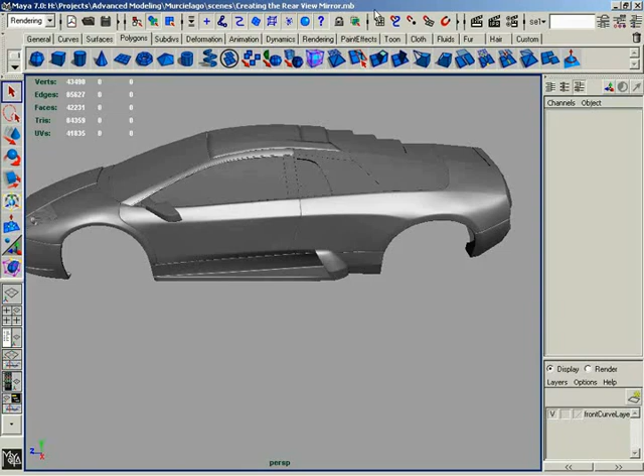Alright, let's continue finalizing the various panels of our car. I'd like to take a second and focus on the roof.

Now, my viewport's slowing down just a little bit. Not too much, but enough for me to notice while I'm spinning around here. So let me simplify some of these verts. That's a little bit better.

Now, up here on the roof, we have a lot of cleanup to do, because this looked pretty good for a preview. But we need to get rid of some of these normal issues here across the top, and you can see we have some tweaking to do. There's some lumpiness and bumpiness that needs to be cleaned up.

So for starters, we're going to get rid of that creasing for the time being, just because a bevel is going to serve us better, very much like many of the other panels we've been using here.

So let's shift right mouse and grab the poly crease tool, hold down the Shift key and click on each and every one of the creased areas. Now, you've got to make sure that your poly crease tool is set to extend to selected components in order to get all these. Then middle mouse click and drag to the left to get rid of all of that creasing.

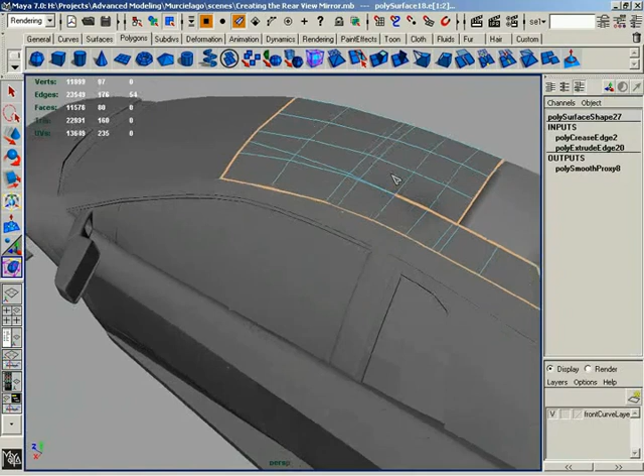Switch to your high res just to confirm. And before we even go about the process of beveling these out, let's take a moment and tweak out some of the areas of our roof, because we can already see some problems. We have a crease running in this direction, and we have a crease running in this direction. Both of these need to be smoothed out before we go too much further.

So I'm going to get my Move tool, and we'll grab vertices and just start spreading these out. Now notice for now I'm curve snapping. Later on, as I start looking at indentions and things like that, we'll start tweaking out. For now, just keep it simple.

Now we have several vertices here along the edge, so make sure you go into wireframe view and get all of these at once. So that should help that crease, and it does.

For now, we have another crease though, because of this little crease that appears here. These edges are a little bit too close together and could probably use some tweaking in their own right. Now, we know just from working with it, we don't necessarily need to have all of this topology perfectly lined up with each other. So let's go ahead and start spreading some of these out.

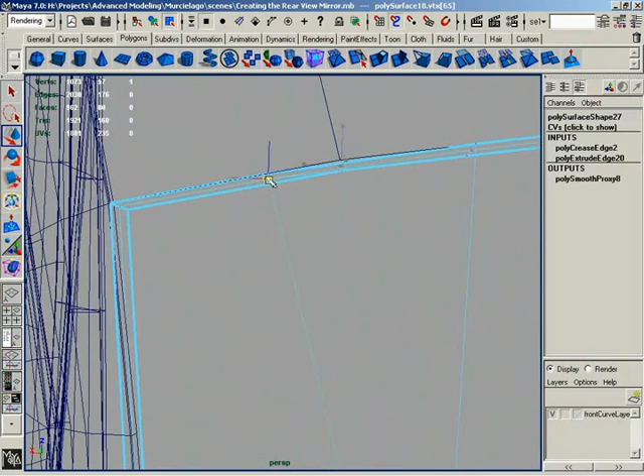Just curve snap these over, and we'll pull this over, like so. And you'll probably get away with pulling that inwards just a little bit. And in wireframe, it looks a lot better.

Let's go to smooth shading. And yeah, a few tweaks maybe aside, that looks a lot better than it did just a few minutes ago.

Now, we need to go ahead and put in those bevels so that we get that nice creasing all the way around our shape so it's not over smoothed. So let's shift right mouse - actually, we can probably get Y, so hit the Y key and get those creases again. And hold down shift, make sure you grab all of those creases, shift right mouse again, and choose bevel edge.

And your bevel is going to be small because of some of the selections you've made, which is fine. We can definitely deal with a small bevel in this case, and if we need to enlarge it, we can do that manually.

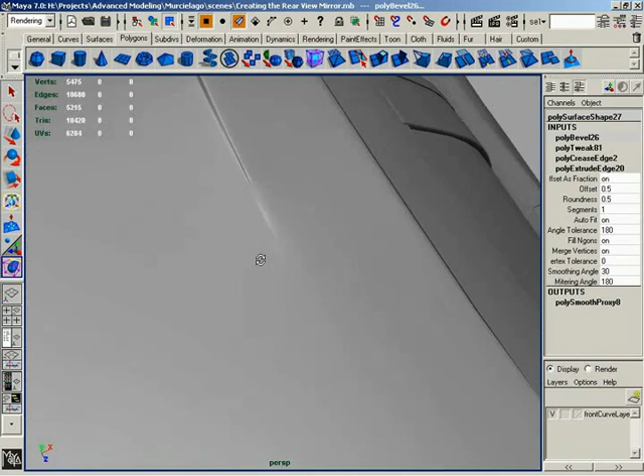Okay, for starters, though, if we switch over to our smooth, you'll probably notice some kind of odd pinching taking place up here where this crease takes place. Now, from certain distances, this may not look too bad, but we can smooth this out.

If we come in and grab our - well, let's go to object mode and then shift right mouse and get the split polygon tool. We'll split this straight across like so, that becomes a quad.

And then you can actually, if you switch over, you'll still notice a little bit of creasing. You can smooth that out if you take these vertices here at the tip, where it's going to be kind of like the bevel wraps around in a little U, and just curve snap these outward, which will stretch out the U-turn area, and that really softens that up.

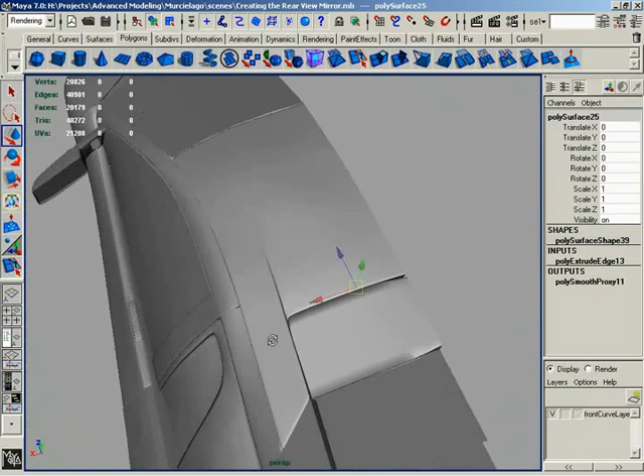I'm thinking that we could probably use a little bit more rounding down this area, because it looks just a little bit too flat.

So what I'm going to do, at least for the time being, is undo to get rid of that bevel, because I don't want to work with so many extra vertices right now. I'll just back up a few times till we're no longer beveled. That'll work.

Let's go to Object Mode, and I'll get the Split Edge Ring Tool. Yeah, that worked out really well. Saved us a little bit of time.

You'll notice that your shape changes just a little bit, and probably looks even more flat than it did a minute ago.

The cool thing is, though, that now we can come in here and grab vertices and add just a little bit of rounding to really help clean up this shape. Now let's take all of these vertices and straighten those out, like so.

Now let's go back to shaded view. What I'll do for now is just gently eyeball these, pulling them up a little bit, sighting down the car.

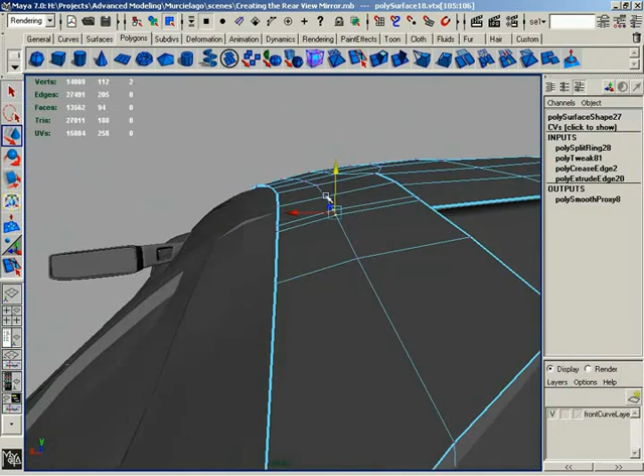I need to come back and separate these vertices here in just a bit. Just kind of make a mental note of that.

Alright. It's subtle, but it should really help things out later on. That still looks pretty smooth right there.

Okay, so let's put that bevel back in. We'll go back down and grab our Poly Crease tool, hold down Shift, and get all of these edges.

Now, I did notice a second ago, there are probably some edges here we don't necessarily need to bevel, such as we don't need that edge or that edge. We probably will need that edge.

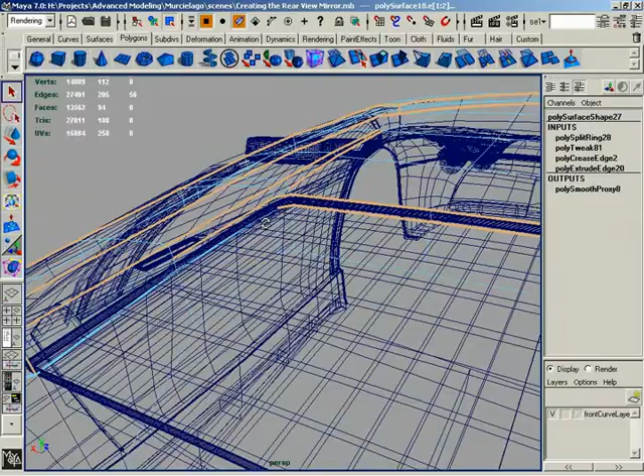So let's take just a moment and customize this a little bit. We don't really need that edge, but we probably could use that one. I'll keep an eye on that — I may need to come back and adjust it later. We don't need these lower edges.

Don't need that edge either. We don't really need to select down there; it won't really do us any good anyway. These you can deselect if you want, but they're borders, so they're not going to bevel in the first place, so I wouldn't worry about them.

So now let's try beveling this, and switch over to smooth. Things actually look really clean right in there, so that's good.

Let's take just a second and put back that little split that we added over here just a moment ago.

Grab vertices and spread this down the tracks a little bit — that cleans that up very nicely. Overall, the roof is looking a lot better than it did a little while ago anyway.

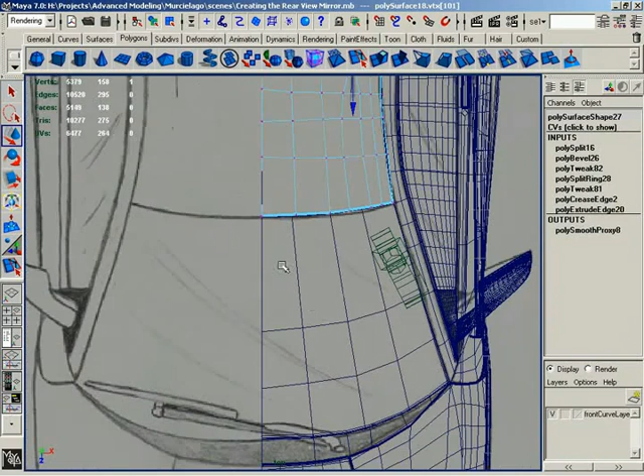Let's come over here to a top view to kind of cross-reference things. Not looking too bad. We'll probably need to come up here and close in some gaps.

Now, just as a bit of a side track, it would probably be a good idea if we took just a minute and smoothed out the windshield. You can decide on your own whether or not to do this — you may not need to.

In fact, I may not need to. I should probably kind of investigate the matter.

The trick is this: depending on the amount of detail you have, you may have a little bit more or less detail than I have on my windshield.

If you think there's a chance the audience will be able to notice the nickeling, or the actual individual polygon faces all the way around the top of the windshield, you might want to consider smoothing it.

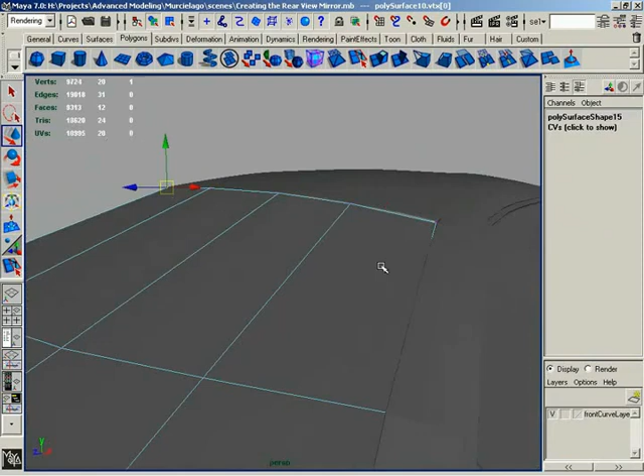In my case, I'm not entirely convinced just yet that they'll be able to notice that, so I don't think I'm going to worry about it.

If I decide to smooth it later on, like after I mirror the whole car over, and I think to myself that it's got to be smooth or it's just not going to look right, then I'll worry about it then. So we'll leave the windshield just the way it is, but keep in mind that may be a concern depending on how you've created your model.

Now, because the door and the roof are now smooth, it's a good idea for us to take just a moment and make sure the door and the roof line up accordingly down this seam. We already noticed a little bit of a problem up here, some minor separation.

Now, because we have an extra edge here, we don't really need to do that little crease technique to pull our corner in. Our corner looks pretty good, actually.

But we do need to make a few adjustments. So grab all of the vertices at the corner — we can pull these in a bit.

Be sure to check your relative elevations. You'll notice that in this case the roof is popped up over the door, so we need to pull that down and put a little more separation in there. This will just be a work in progress.

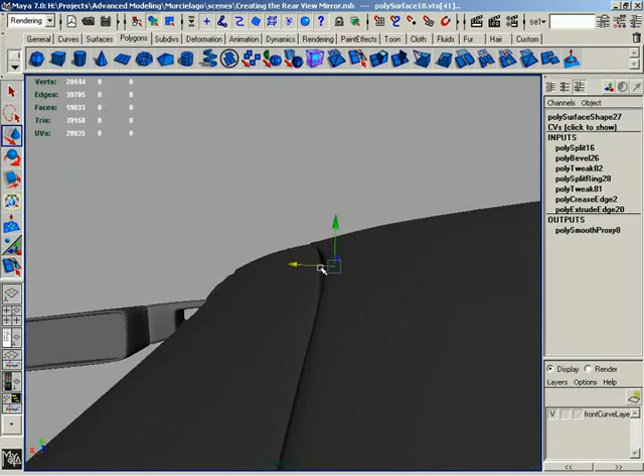Work in progress. Just walk down the side of your car and clean up the seam in between the two.

Now, if you should notice an area where you need a little more detail, it's possible, hard to say really, let me back out. Nah, I think I'm okay.

You might end up with an area like right here. It might help to have an extra edge. Don't be afraid to put one in if you think you need one, like if the smooth is just straightening out too much and starting to pass through the door. Let me put one in just as an example.

Just come in here and grab the split edge ring tool, pop in a new edge, and when you have it selected, you can add your little bit of rounding just by popping that up a little bit. Now you've got some vertices over here that you can work with.

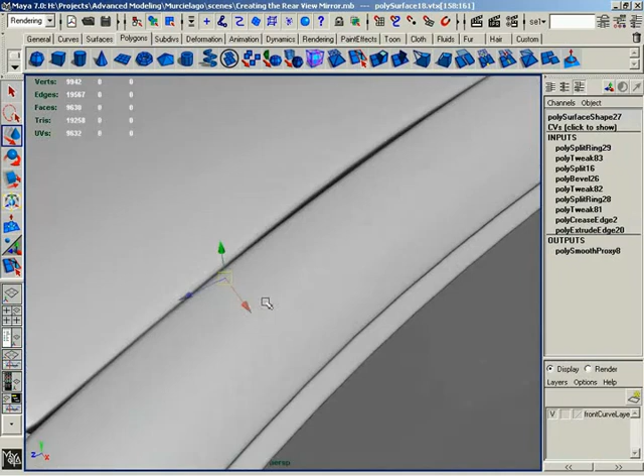So now we can adjust that, make sure that gap is butted up nicely. We can adjust relative elevations, and now move to the next section.

So it's all about if your mesh seems to be straightening up a little bit too much, you can clean that up a bit.

And pull this out, clean up that little gap. I'm just hitting those arrow keys. You can probably hear it coming over the speakers.

Right. Whoops, went the wrong way.

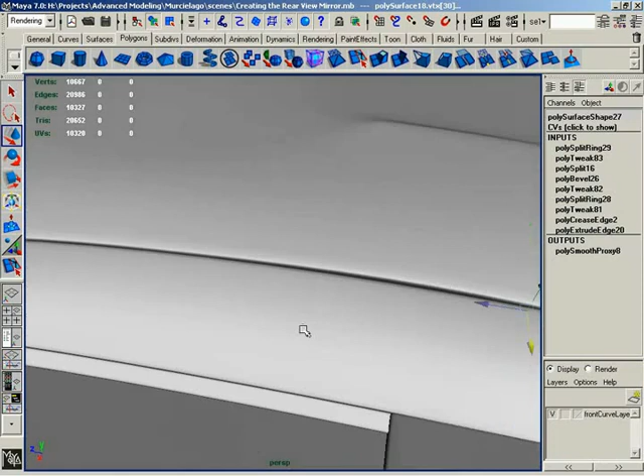Now, I'm not going to worry about cleaning up the gap in between these two pieces right now. This piece is yet to be finalized, so I'll come back to that a little bit later.

Over here, probably going to be a good time to maybe do a few tweaks. Looks like we may have some very slight denting right here. It's a little hard to say, really, so hard to say that I don't think I'll stress about it too much.

Maybe this piece could come up. This is where you can just kind of kick back and be a little nitpicky.

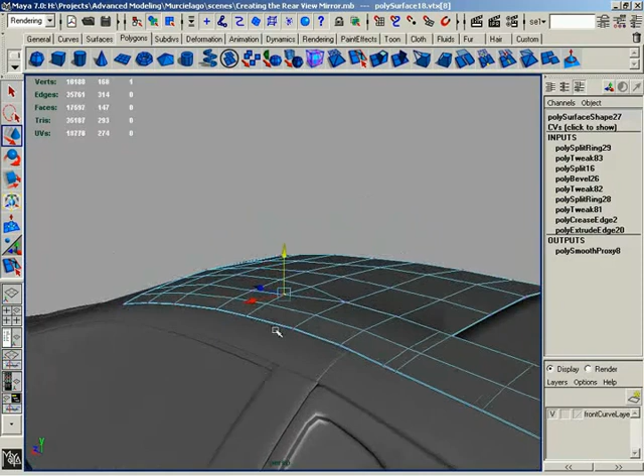Looks like could bring this up. Yeah, it looks a lot better. Skip that one, maybe tug this one up.

You'll start to notice patterns that you can follow real easily once you get to a certain point.

Is it just me, or is that whole area kind of dipping in? It really looks like it is.

If you want, and I don't recommend you do this and leave it, but what you can do is go ahead and mirror this polygon just as a test. So if you shift right mouse, you can go down to mirror polygon, negative X, select your poly mirror and set your merge threshold down to something very small.

Now in this case, you'll notice that we didn't have all of our vertices lined up, so we need to undo that. Let's click on the x-axis, and we'll grid snap holding the X key and just middle mouse gesture, and that should clean everybody up.

Now let's do that again. So, right mouse, mirror polygon, negative X, boom. Take that poly mirror node, set its threshold down to something very small.

And this will help you see things like dents. You can see now I've got a little bit of a dent here in the middle, it's a little more obvious. So if you're having a hard time making those out, just remember that you can do this.

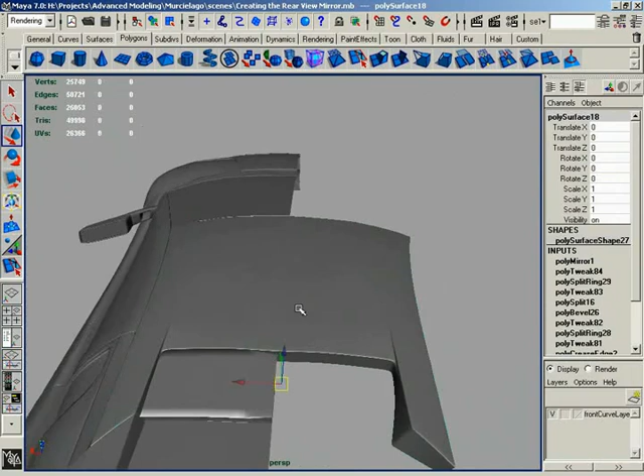So I'll undo. I kind of saw them there to begin with, but I wanted to give you guys a way in case you have a problem making them out for any reason whatsoever.

Now one of the ways to fix this is to take each of the vertices at the central axis, and you can snap them in Y to their next door neighbor. So point snap, make sure you didn't click on somebody you weren't supposed to, and then make sure they're just pulled up a little bit.

Because you don't mind a little bit of upward doming, it's just when you dent in you start to have problems. So you can test all of them that way, or like in my case, I know that that's dented in.

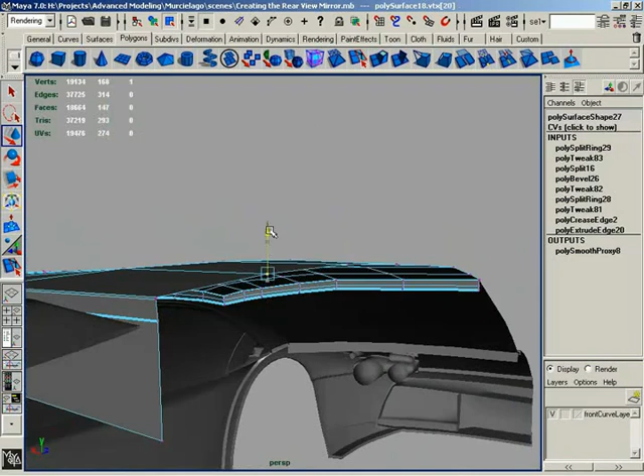So we'll just kind of pull these up a little bit. Also, if you don't want to stress about it too much right now, keep in mind that after you mirror, it's a good idea to go through a final tweak phase, or right before you mirror, actually both—do once before and after. So we'll probably have some last-minute tweaks right before we mirror things over. Once mirrored, we'll grab all the central pieces that have been mirrored themselves—things like the roof, the hood, the front bumper, anything where two pieces have been duplicated and merged together to form one single new piece. We'll take some time and look at those to make sure any tweaks that need to be made are made.

Alright, so let's go back to object mode, take a look at our high res. Things are looking sharp all in through here. A little bit falling off as we come back in this general direction, but that's okay, because we need to finalize this piece and then we'll start matching all of that up. So, one thing at a time, they say.

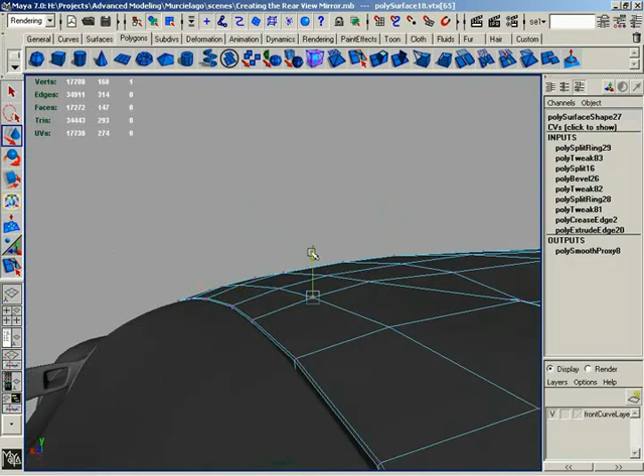Now, I could be nuts, but I think I'm noticing some denting in this area here, probably due to these vertices. It's going to be a little tricky to see—a lot of these you'll only notice at a certain distance. Like if I back out to here, it becomes a little more obvious. Maybe earlier when I was pulling out these rounding verts, I got a little carried away on a couple of them, which could cause that. Actually, that one little bit I just did helped out quite a lot.

Now, I'm thinking that the next dent is taking place right in here. I'll gently pull these up just a little bit. That looks a lot cleaner from back here.

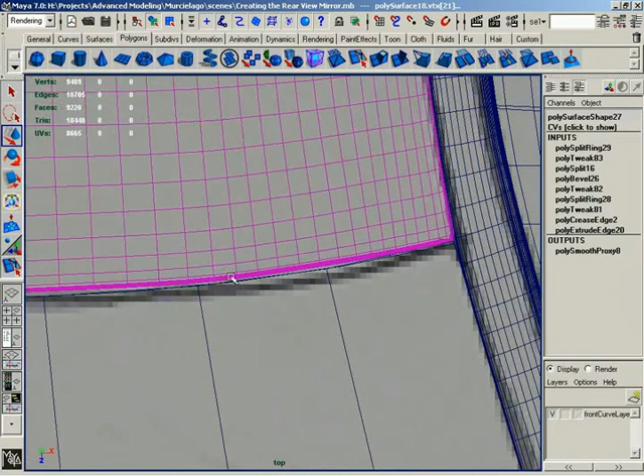Okay, let's pay attention to what's going on up here across the front of the car—or across the front of the hood, the roof anyways. Alright, one row of vertices at a time here. Double check in the top view. It looks like the roof actually needs to be pulled forward to meet the existing windshield geometry. So that's the way we'll handle this—we'll pull forward in X, like so.

It looks like as far as relative elevations are concerned, I'd probably get away with pulling this up. It's really more or less just to catch a highlight across this panel, not really for any other reason, because I imagine that on the real automobile, these pieces are going to fit together really, really well. I mean, come on, it's a Lamborghini.

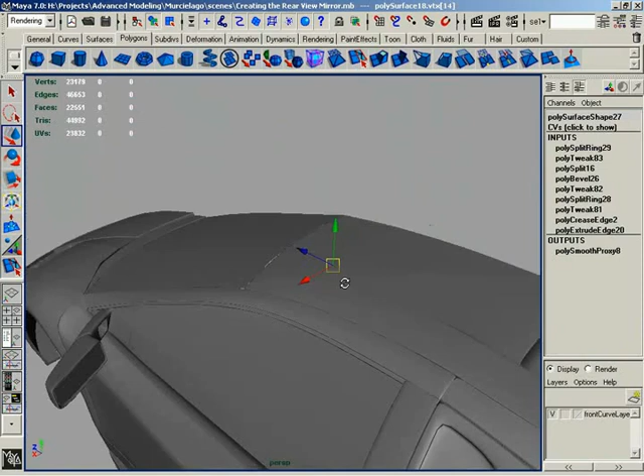Alright, and yeah, let's pull these guys down just a little bit. Now make sure that didn't put any nasty dents in what you've been working on so far. Seeing just a little bit of a dent in through here, maybe something very small, probably virtually imperceptible, but alright, now let's double check with the top view.

Yeah, we'll bring these vertices on the roof forward as opposed to bringing the windshield back. Okay. Excuse me there. And let's see, looking good up through here.

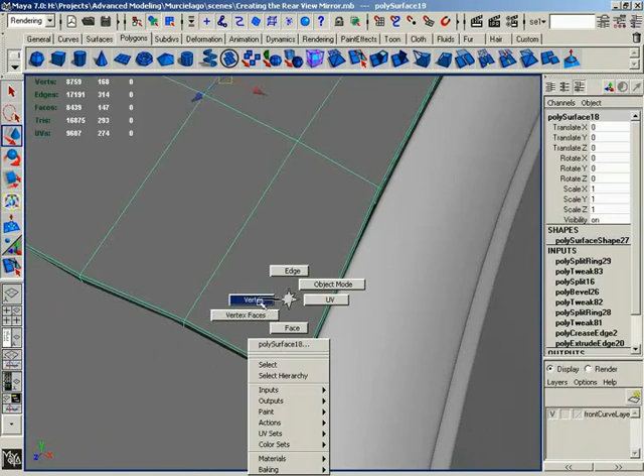We could probably take the corner of the windshield, though, and pull it down a little bit, because it is sticking up beyond the door. That's a minor problem. We still have this corner, which is separating a little bit, and we can pull it over a little, and that will help things out. Also, it's going to be a good idea to grab the windshield and actually tuck it in just a little, just to help things out.

Now, again, we're starting to see some separation in what the windshield is doing, so it may be a good idea—I know I talked about it earlier and had at that time decided not to—it may be a good idea to go ahead and smooth out the windshield. Now, we know from past experience when we smooth out the window that this will cause the corners to be rounded out. So what we're going to do real quick, the same thing we did before, is grab our split edge ring tool, and we'll put extra edges at the far ends of the geometry.

So, like so. And actually, we should probably set this over to relative. I believe it's a little closer to absolute. Let's go to object mode. Yeah, we'll set it over to relative.

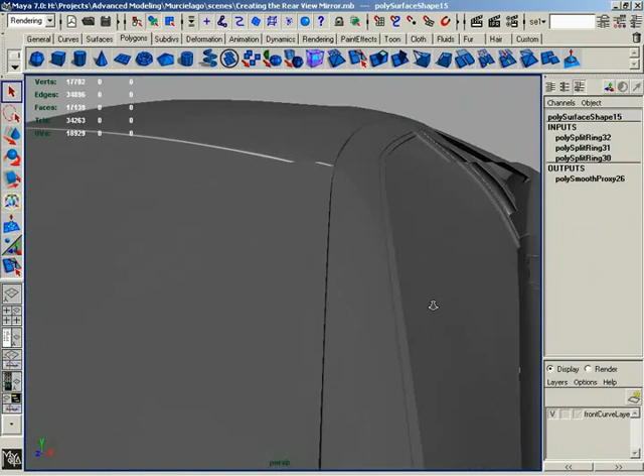And there we go. So with that, if we select the object, hit Control tilde, we get a nice smooth version of it, which we can now test out and see how that lines up. Much more smoothly all the way across. Can probably grab this vertex and tug it up just a little bit. Ooh.

It's interesting. Now let's see here, if I grab this vertex, I'm running a quick test. It looks like I might have... no, okay, I thought the connection between my smooth and my low res was destroyed there for a minute. Just making sure I haven't completely lost my mind. There we go. Don't know what was happening there, but as long as it's not doing it now, that's fine with me.

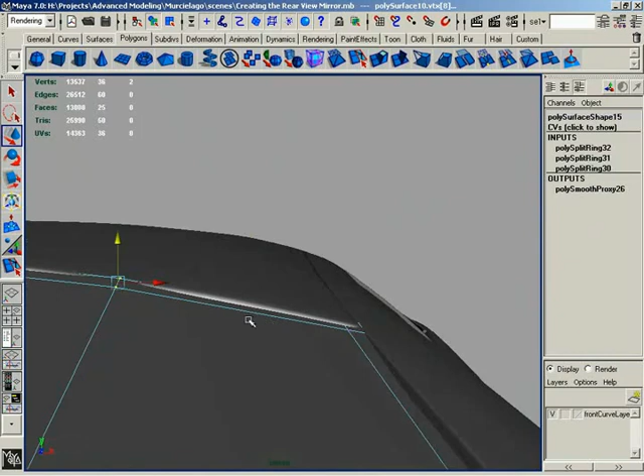So we'll pull that over. Probably tug that up just a little bit. Might be a good idea to have another edge of detail over here, because the windshield stays pretty flat most of the way across, but then gets a little more rounded here toward the edges. So it would make sense if we wanted to add some more detail here toward the end of the windshield.

So we'll just use the split edge ring tool, split down the middle, grab this new edge and tug it up just a little bit. Actually, won't even do that because I don't want to move some of the verts down there at the bottom. Okay.

Actually, maybe pulling these forward in Z might be a little more of a subtle way to create that rounding we're looking for.

Alright, so it's looking sharp. We could also, just for sake of argument and cleanliness, go ahead and add blinn1 to our windshield temporarily. That way we can see a reflection. Or if you want to get fancy, you can assign, was it phong1? Is that the one that was transparent? Yeah, so have a little bit of transparency there.

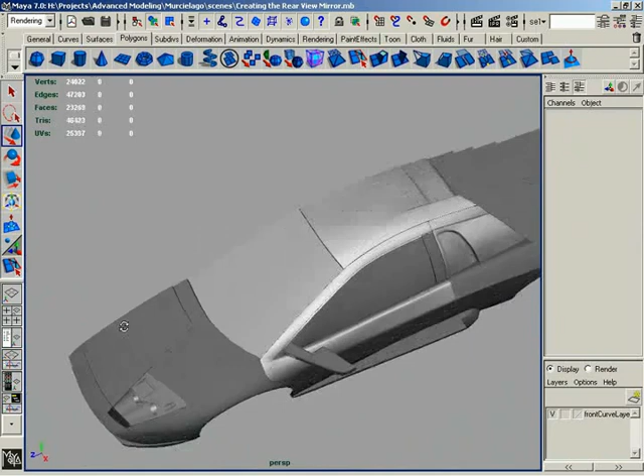I'm going to take just a second, though. That's just a little too transparent. I need to remember that the thing is there, so we'll bleed back a little bit on that transparency, just for the time being. So there's a window for you, and we can do the same thing over here.

So now your windows are starting to look and behave like windows. How cool that must be. And I think that moves us over here to this next piece of the roof. Yeah, I can't think of anything else we really need to do up there for now.

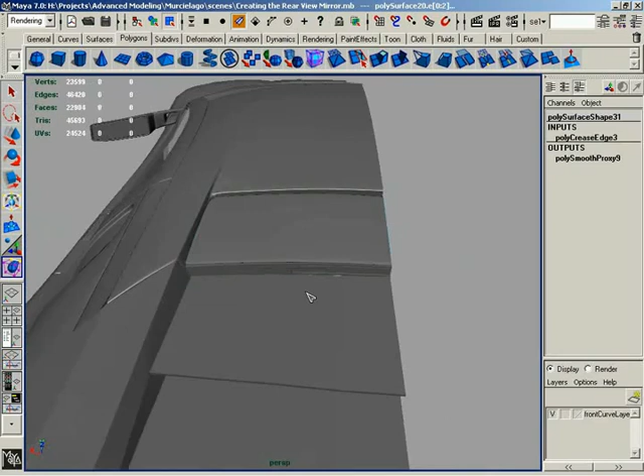So let's grab this piece, and again, the creasing at the corners is just a little too dramatic for us in this case. So we'll grab the poly crease tool, grab all of these, middle mouse, drag to the left to cancel out that creasing. So there's a confirmation that all of that has gone away.

And with those edges selected, we'll just bevel and give a quick test. And really, things almost immediately look just right. A few tweaks aside, it looks pretty good.

So let's start grabbing some vertices. It looks like we've got some relative elevations we need to clean up a little bit. A little bit of creasing that we could adjust here and there. So we'll pull this up, make sure these are at very close to the same elevation.

And grab the next row of vertices. Same thing, pull back a little bit so they're not completely running through one another. And over here, continue. Got a little bit of a gap in there. Maybe I should go ahead and close that in. It's a lot better.

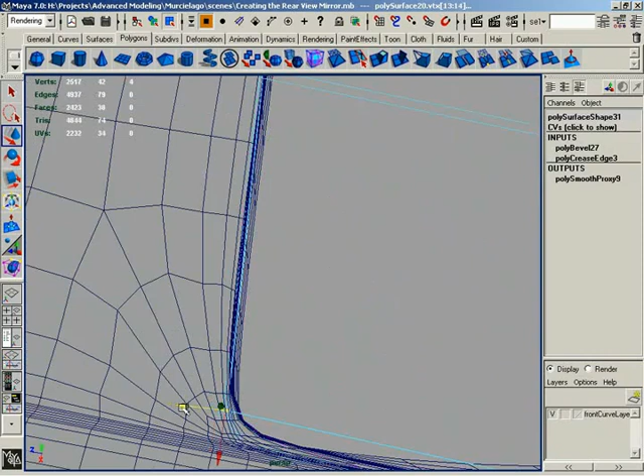And can't even see that one, so we'll pull this out. In fact, let's pull it out until we see a gap, just so we know what we have to work with here. And we'll pull this up. Seems to help out a lot.

Let's grab all of these vertices, and we can pull these up. Now notice in the proxy mesh they are kind of running through one another. That's very common, don't let that get to you too badly.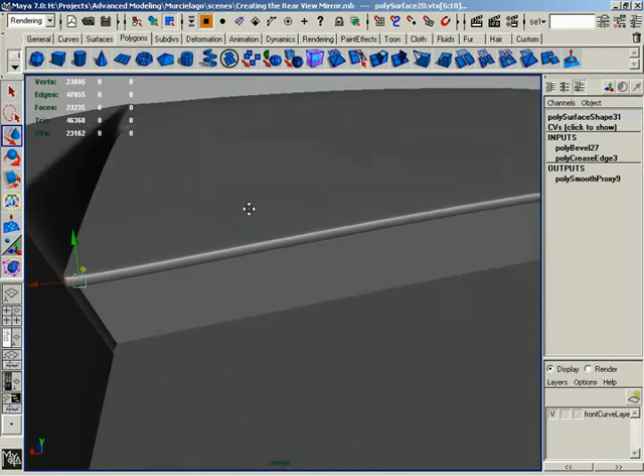And then over here, we'll just pull these out until we can kind of see the joint. Actually, let's pull that back a little bit, something kind of like so. Nice and rounded all the way around. Okay, so I think that's going to work for that piece.

A little bit of a downward slant, which actually I don't really have a problem with. I imagine that's pretty close to the way it is on the actual car. So I think that's going to just about do it for the hood, the roof.

Thought I noticed a couple of dents here. I know, I'm like Moby Dick when it comes to the dents. I think I see them and I just go crazy, Captain Ahab kind of thing.

Okay, so I think that's going to wrap it up for the roof. I can't think of anything else to add. Now, while we're back here, we could clean up this panel, which should be pretty quick. In wireframe view it's already looking good, but there's a few things we need that aren't in place. We need some thickness edges to help keep contiguous rounding at the corners. Let's start by creating those.

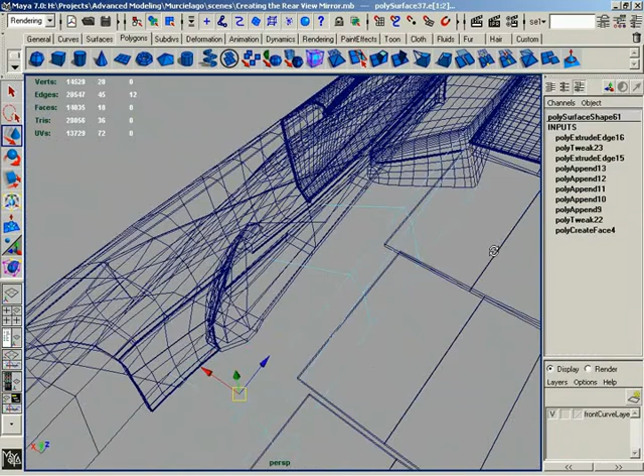Let's grab all of these edges wherever two panels are going to be meeting, and we'll simply extrude these, pushing them in Z local. There you go. Now I don't even know if this thing has been smoothed—I don't believe it has, so let's take care of that. Hit Control tilde and shift over to your smooth.

Go ahead and right mouse, materials, and drop that blinn1 on it.

In fact, I know I've been so disorganized here lately, so you guys should all—everybody on the other end of the machine—boo me real quick for being sloppy. Come on, I want to hear it. Boo! Alright, I'm going to go ahead and name my materials just real quick.

So we'll call this car paint. I heard one of you not booing. Glass. And we'll call this—not block, but black plastic. So there you go.

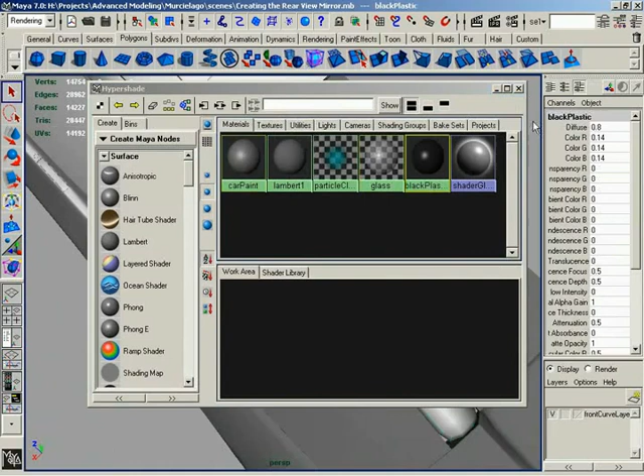So here's our little piece, looking pretty good. We, of course, need to do that bevel trick, so let's make sure we bevel this piece because it looks like it needs a nice solid crease all the way down. Let's go into wireframe view so it's easier to see what's going on. We can grab that and bevel this corner that comes in just for good measure. We probably won't need to, but it'll keep things looking nice and neat where these edges meet. We might need to clean some of these up down here, but we'll get to that.

Now let's see—that corner and this leading corner all the way down. And grab that corner and that corner. I think that's everybody. Just to be safe, grab this corner and this corner. Could also put a bevel here, down through here just for good measure, because you can see the change in direction that takes place there. If you do that, run it all the way to the end of the surface, and grab the little indented edges as well. I think that's everybody we really need.

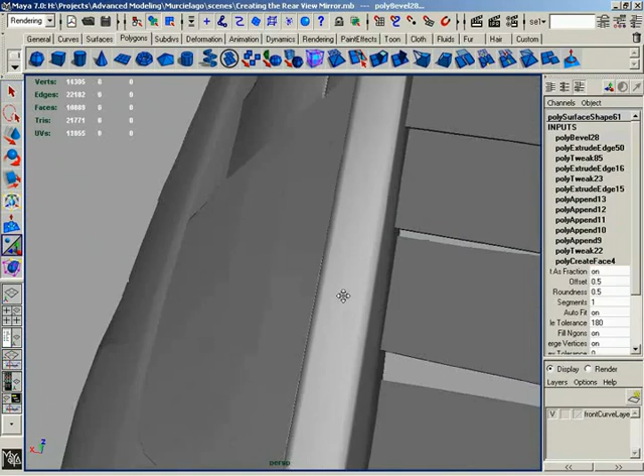So let's shift, right mouse, bevel edge, and have a look. Already that looks pretty sharp. Let's go ahead and push up to the second level of detail. And I am relatively pleased.

Now, we have a little bit of rounding on this surface here on the roof, and we have no rounding here. I don't have a problem with being nice and flat by the time we get back here, because I think that's more accurate to the car. But up here toward the top, we may want a little bit of rounding. So let's grab the split edge ring tool and drop an edge down through the middle of this, which will help flatten this out as we go down. Up at the very front, we can grab some vertices and subtly adjust, pulling that up so those kind of meet.

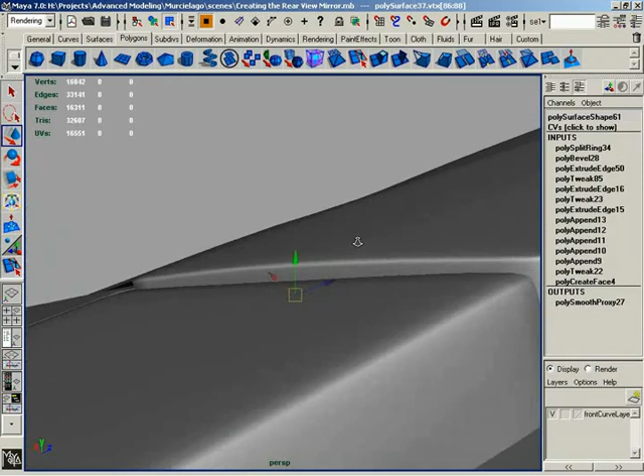We also need to make some adjustments here as well. Let me back up a little—I'm thinking this piece of the roof might be a bit high compared to this. We've got this panel—sorry, not panel, the little wing vent guy—and he's lining up pretty well with this guy, and this guy's lining up pretty well with him. So the roof, in this case, is the odd man out. We'll select the roof and start bringing it down to match up with this piece, as opposed to the other way around.

Now that does mean we could get rid of a lot of our rounding here at this stage, which would probably be a little safer on our part. If we pull that down, that starts to line up. I'll leave that edge I put down the middle, though, because it really did add to flattening that piece, and I like that—makes me happy. Let's leave that smoothed. Let's grab vertices here and butt those smooth meshes right up against one another. Check that relative elevation, which looks pretty good since we've already tweaked it. Okay.

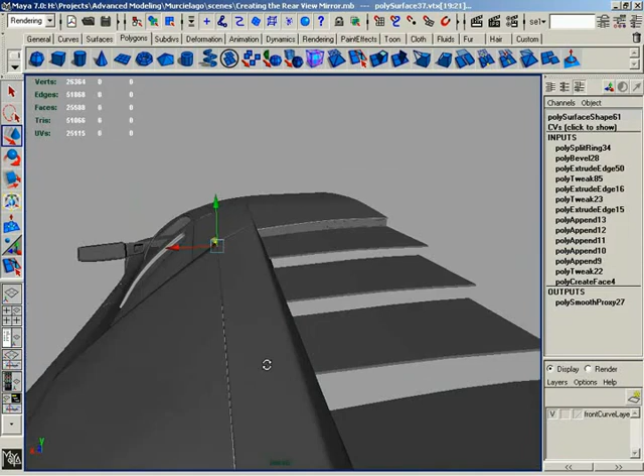Right, looking sharp, all the way down. Nice crease running through there that I'm liking, so that definitely works for me. I think that's going to do it. It's probably about all we can match it up to at the moment anyways.

I think there's one thing we can do, and it's a little bit nitpicky, but it looks like some of these vertices are sticking inward toward the center of the car just a little too much for my taste. Or maybe not, maybe I'm just out of my mind. No, that's fine, I was just nuts, it just looked like it from that one angle.

That's looking pretty good, I'm pleased and happy. Let's also take a moment as we progress around cleaning up bits and pieces of the car. Let's finalize this little quarter rear window area, which is a little bit dented and has a few areas that need better rounding and so forth.

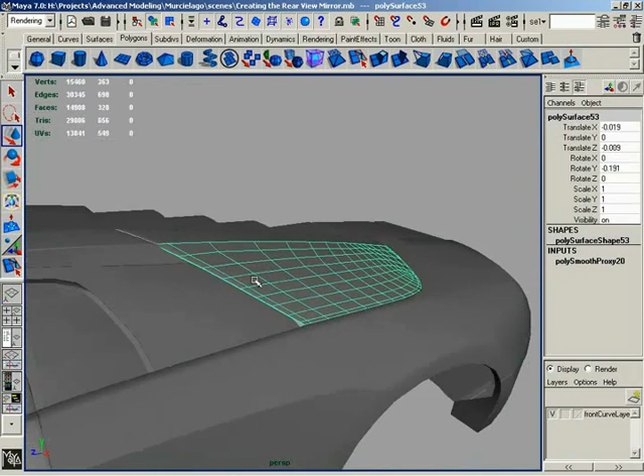Now, I'm thinking, which I know is dangerous and I shouldn't do it quite so often, that if I were to delete these two little faces here inside this crevice, it might be a good idea for me to grab, well, probably all of these edges, but I'll just start with these two for now, and extrude them straight back, pull them down a little bit, and basically extend this surface in a little more into the vent.

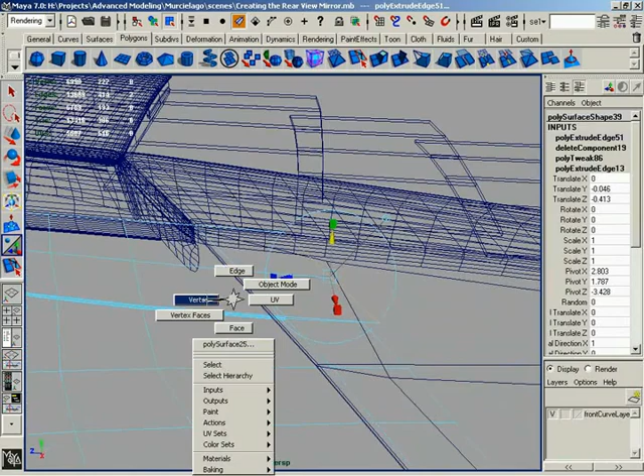Just because I'm seeing that on some of these pictures, like right here, you see it kind of going further into the vent, so we'll do that. Now let's go into wireframe view so I can see this piece a little bit better. I'll go over to vertices and just start making those adjustments.

Okay, and if I were to, for any reason, rotate this wing up, we kind of see that disappearing off into the distance. Maybe even a little bit farther would be nice, but before I do that, it's probably a good idea to recreate this gap in between the two.

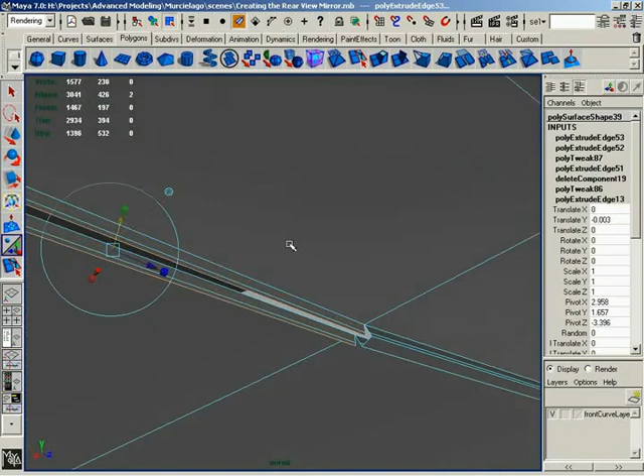Very easily done. Looks like all we really need to do is grab these two edges, and we can extrude them. I'll pull them straight down in Y world. Hit G, extrude them again, pull them down in Y world a second time. Go back to object mode, shift right mouse, append to polygon tool, and append across the bottom. Then all you really need to do is start snapping and merging vertices.

So let's get the camera someplace where we can use it, and we'll snap, snap, snap, and snap. Is this 10 vertices? Which become, whoa, not 1, it's a little overdoing it. Becomes 6, which is right, because there were only 6 I wanted to actually merge, or something like that. Close enough, now that all looks pretty good.

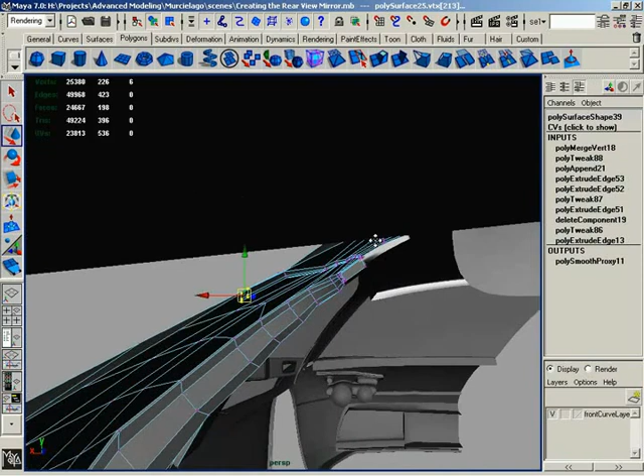Grab these verts, not those up there, just these, and kind of smooth out that a little bit. We could take the wing vent itself and maybe pull this back up a little bit, make a little bit more room. Not too much.

Now the rest of these verts, I'm simply going to pull back a little further into the vent area, basically extending this geometry inside just a little bit further. Try to keep it out of the way of everything else that's going on. There you go, that's far enough where I think the audience can safely forget about what's going on in there. We'll probably be sticking like a filler polygon inside of there at some point.

Okay, now back over here. If we take a look at this guy in high res, looking pretty nice overall. I mean, the general structure is correct, just some cleaning and adjustment that need to be done to kind of get them all wrapped up, finalized, and happy.

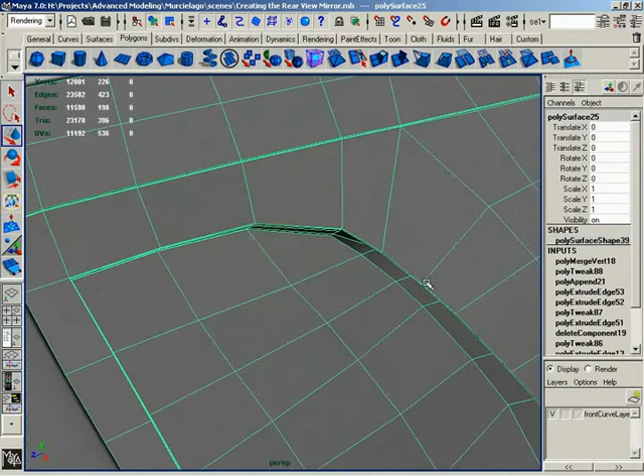Now, first and foremost, we have this gap that runs across here. Everything's all nice and connected as far as that gap goes, but we have some cleanup that'll probably need to be done. I'm thinking that this extra edge running down the inside of this gap is helping me out right now, but it's going to make my job more difficult here soon, especially if I try to bevel out a lot of what's going on in here. So what I'm going to do is get rid of those extra edges.

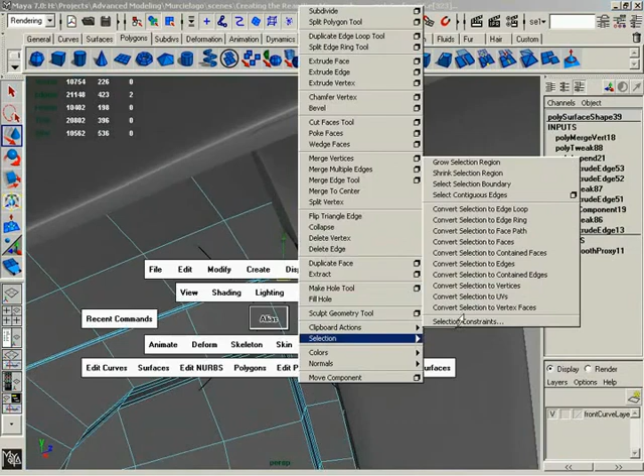Let me frame up on this one edge so I can see this really well. So there's one edge, there's the other. Again, we're on the inside of that little crevice that runs down this shape. Now let's go to Edit Polygons, Selection, and the Select Contiguous Edges, Delete Edge.

And even that doesn't look too bad, but it is kind of starting to soften up a bit. Now we need to create a few thickness edges in here.

Now, something you can do if you think it'll help, and I could do it just as an example, is we could temporarily get rid of this whole indention for the time being and put it back in a little bit later. That might actually help us out as far as making this whole thing very easy to create, because you'll notice we've got some extra edges running down this piece just to help us get some of this in place. The fewer edges we have to work with right now, probably the better.

So here's what we'll do. We'll switch over to faces, and I'll select all of these. You'll notice I'm marquee selecting in through there, so I'm getting all of the faces that make up that gap.

Ooh, looks like that could be straightened up a little bit, doesn't it? I just want vertices, thanks. No, vertices on this piece. Thanks again. Let's frame up on those so I can pivot about them for a moment.

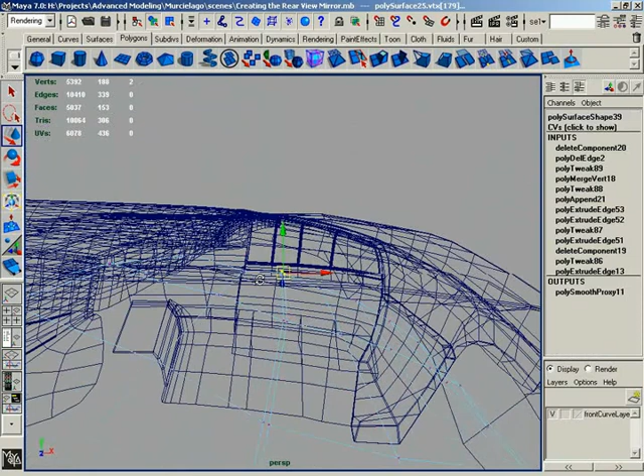So yeah, we could probably pull that up a little. And pull that up a little. And pull that up a little bit. Alright, I'll worry about the hardcore tweaks later, but some of that needed some adjustment.

Alright, so now let's do shift right mouse, grab the append to polygon tool, and I'm just going to append straight across to fill in that gap. Provided that I can append. There we go.

Oh, I had the caps lock key on. Watch out for that. I was trying to hit Y with caps on. Just doesn't work.

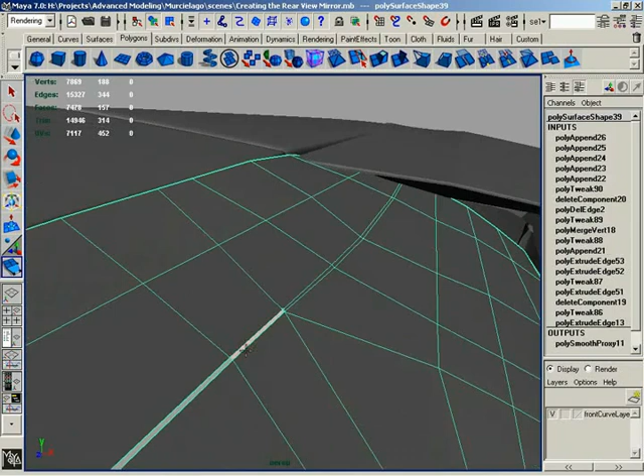Okay, so now if we look at our smooth, that crease is still kind of there because of the nature of our geometry, but the gap itself has been taken out.

Now I did have one more series of edges that we should probably go ahead and clear out, and that would be these two series which run all the way down to the end of this shape. So let's go to, again, Edit Polygons, Selection. Let's grab those contiguous edges and delete those.

So we've simplified this quite a bit. Should help us kind of expedite the tweaking and finalizing process.

Okay, now while we have so few edges lying about, it'd probably be a good idea to tweak out some of what we have going on here. It looks like our gap sort of changes thickness a couple of times, which we should probably clean up a little bit.

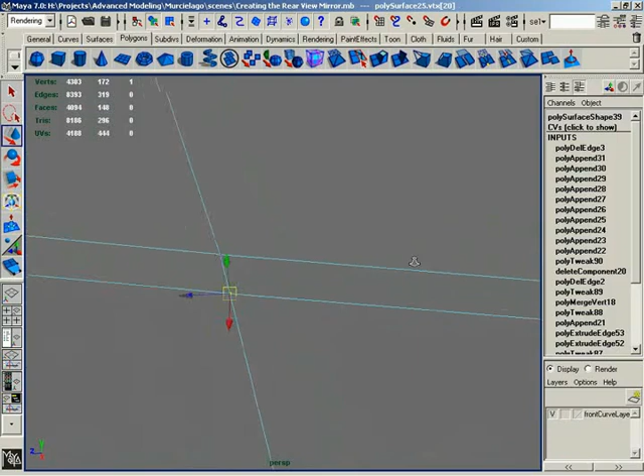So I'll take the two vertices, pair at a time, and scale them together. We could also, let's see, if I grab these two, frame up on them. We could straighten that out a little bit. Straighten that out a little bit.

I'm sure we'll have some tweaking to do as far as elevation's concerned in there. And we'll straighten this out a little bit. Pop these up, because I'd like a nice continuous shape of the surface here, if at all possible. That's already helping.

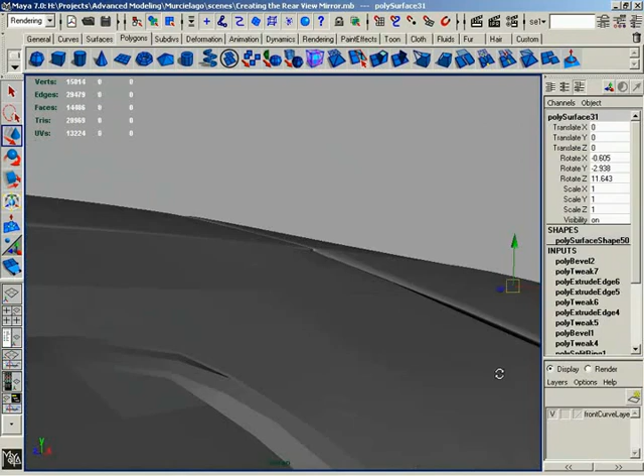Okay. And I don't mind it starting to kind of slope off once it gets inside a bit. It looks like that's rotated up and this one isn't. You really got to kind of love that, don't you?

That's okay, we'll just get it close and we'll call it even. What we'll probably end up doing is rotating that back down, killing out our smooth, and putting in a new one.

Alright, and let's get back over here, though. Now we have some denting that kind of runs down this area here, so we should have a look at that, and we can see it immediately.

Let's switch our move tool over to normal mode. Also, let me take just a second and let's kill out our history because we got quite a bit of it. Normal mode should help us really straighten out a lot of these vertices.

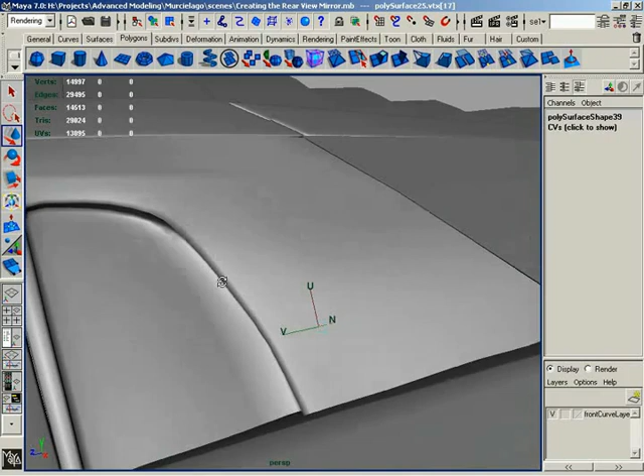Double check on your smooth from time to time. Ooh, it's looking a lot better, much better. Just a little denting up here.

Not bad. So as we move around here, now we are at 1 level of smooth, and everything else on the car has been 2 levels. So let's set this to 2 levels so we can get a better idea of what sort of denting we're looking at.

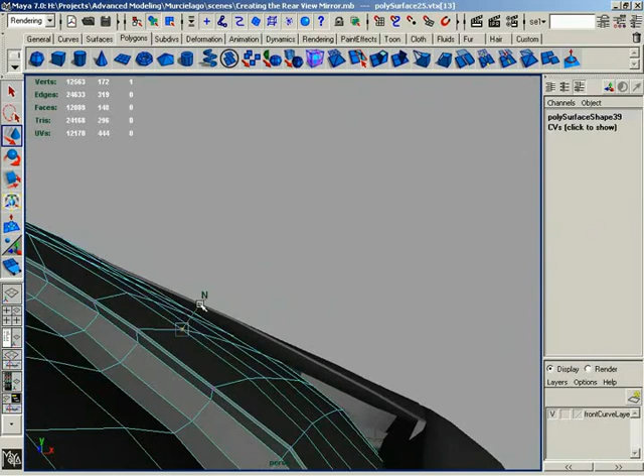I think maybe this vertex can be tugged out a little bit along with its immediate neighbors. Again, I'm not too worried too much about this crease. That's going to change when we put the little segmented crease in there anyways.

So I guess that puts us over here at this window, which could use a little bit of assistance getting more rounded. What I'm going to do is grab entire rows of CVs, vertices, that control not only the crease itself but the entire indented area. Set our move tool back over to world for now.

Already that's helping quite a bit. Nice smooth curvature all the way up. Pull that up a little bit higher. Pull this one out. And it looks like we have some depth considerations.

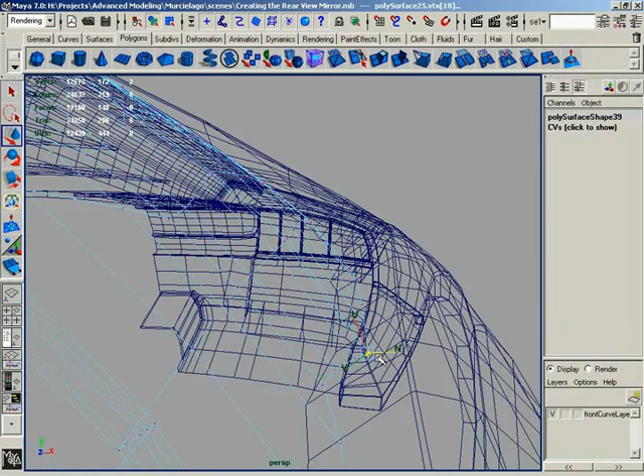I'll just arbitrarily scoot that around. Probably be a good idea. Well, normal mode won't work there, but world mode will. Tug these back out a little bit. Clean these two up just a tad. And then we can scoot here along the bottom and do something very similar. Keep these all nice and tidy.

Okay, looking pretty nice so far. We do have some more denting here in this area that we can also clean up. Again, let's switch back over to normal mode, which is our preferred method for adjusting vertices in the middle of a mesh. I'm going to push each of these here at the indentation inward just a little bit, so I'm preparing ourselves to have a little more inward curvature.

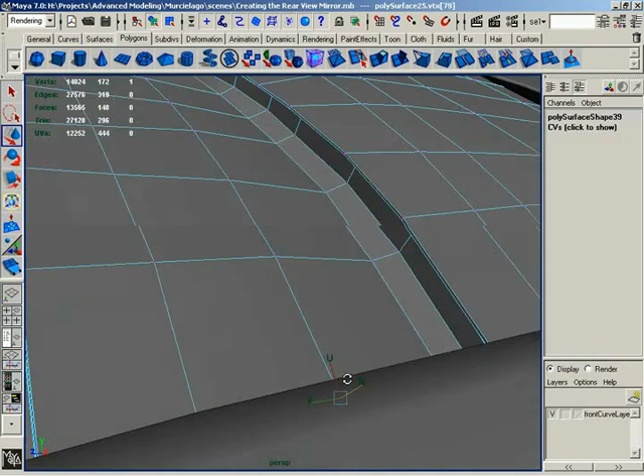Pulling these out a little bit. Ooh, much, much nicer.

Okay, looking very nice. So I guess it would be time to start worrying about the little bit of creasing we need going on here. What I'm going to do is, now I'm going to try this. I'm pretty sure this is going to work out really well. It may not. I'm going to shift, right mouse, grab the split polygon tool, and split this right here at the corner.

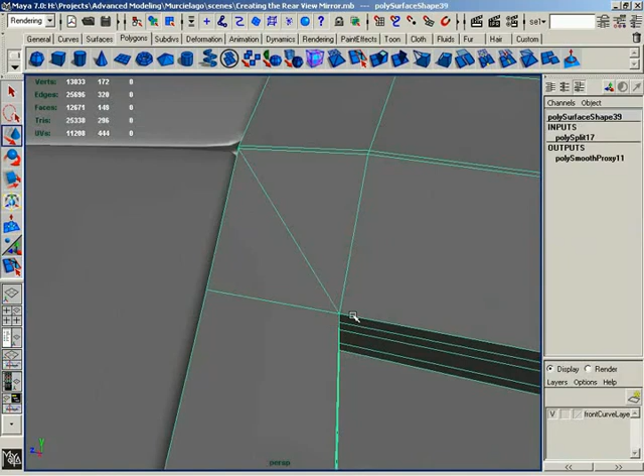And then I'm going to grab this corner and bevel it, so you get this huge bevel that we don't really need all of. We need that to be a lot smaller. Let me slow my virtual slider down again, so wow.

That helps quite a lot, actually. That corner's still a little bit questionable, but don't worry about it just yet. We still have to add some thickness edges in through there, so if we need to make tweaks to it at some point, we will. For the time being, no stress.

Okay, now that's a little five-sided corner, or five-sided face. But it doesn't really seem to be doing too much damage. Not from any respectable viewing distance, anyways.

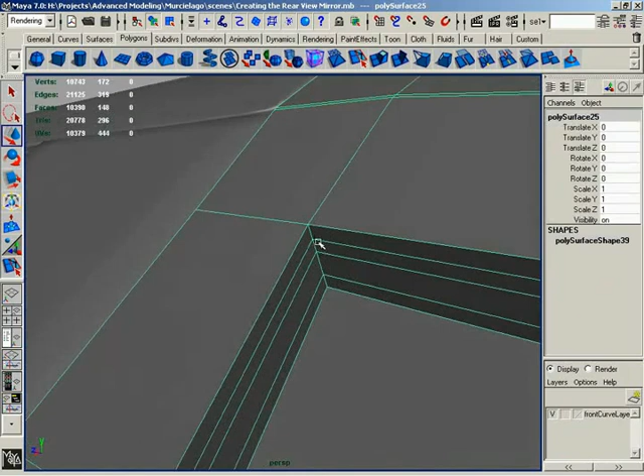What we could do, as an alternative, if I undo, probably get rid of that edge. Let's just see what were to happen if I didn't put that corner in, and we bevel this. We just get one five-sided face there, which I'm not too stressed about. Let's pull that offset way down, and maybe just a little bit cleaner.

Now, if I take these two vertices and merge them to center, nah, we won't do that. That's looking pretty good, I think.

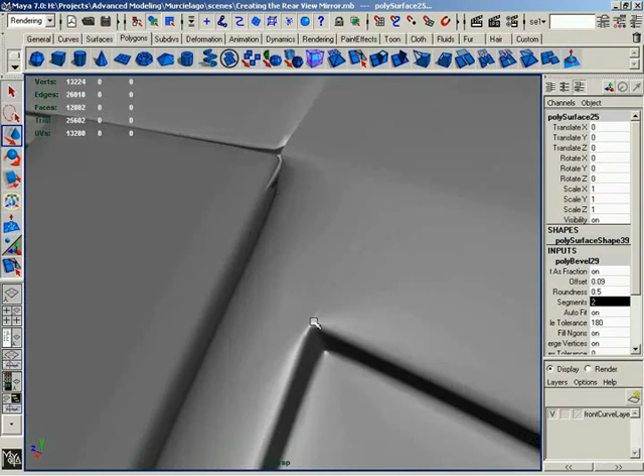Out of curiosity, now I know this probably won't... I mean, the chances of this looking good are slim to nothing. I just really want to kind of play for a minute. Take my segments and set them up to 2. That should probably kind of help destroy that corner. Not really, but it does give us this nasty thing right here that we don't really want. Could probably clean that up.

Let's see, we could delete out this edge and this edge. We could grab... I'm experimenting for just a minute. We'll grab the split polygon tool, could split that right down the middle, and then split that, which turns that into 2 quads anyways. And, oh, that's not too bad. Still a little bit of a sharp corner you can kind of feel right there, which, if I made this whole thing a little more planar, would probably fix up quite a bit.

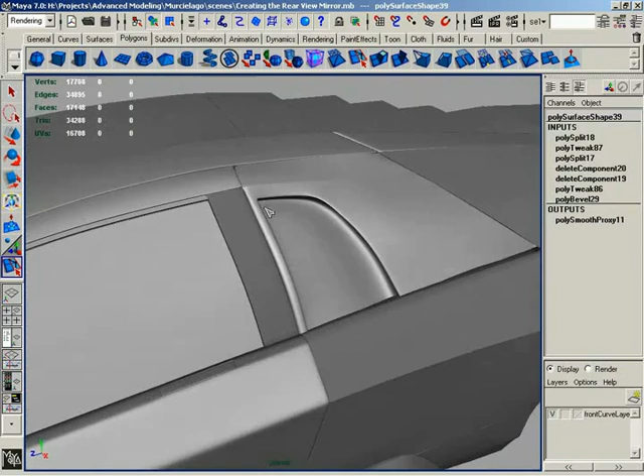I'll leave that for the time being, and then later on if I change my mind about how it looks, I'll come back and make some adjustments. Also, since we have that little triangle there, we could split that through here, making a tight little corner that looks pretty sharp from back here. I don't really have a problem with it right now, so we'll leave it. Later on, if I come back to it or notice it, like you can kind of see it right now from this angle, keep that in mind before you consign yourself to leaving something like that in place.

I'm going to go ahead and undo. I'm not going to call that a failed experiment just yet, but I'll put the idea in park. I'm also going to undo this bevel, because I want to try one more thing, which is to bevel all of this at the same time, to put a little bit of a bevel here so it looks more like two separate objects.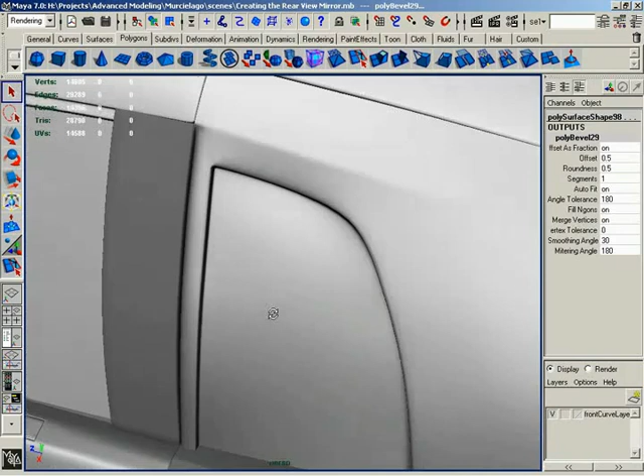Let's bevel that. That's already a pretty tight bevel, and that's not too bad. Yeah, I think we can actually work with that. The corner is a little bit round, but I don't mind that too much. I think that's going to work out just fine in our case.

So the other thing I'd like to do is, now that we've drawn so much attention to this crease, let's make sure that crease looks really nice and is rounded very well.

Okay. Now, because I've gone and looked at another area, it looks like there may be some flattening over here that I could look at.

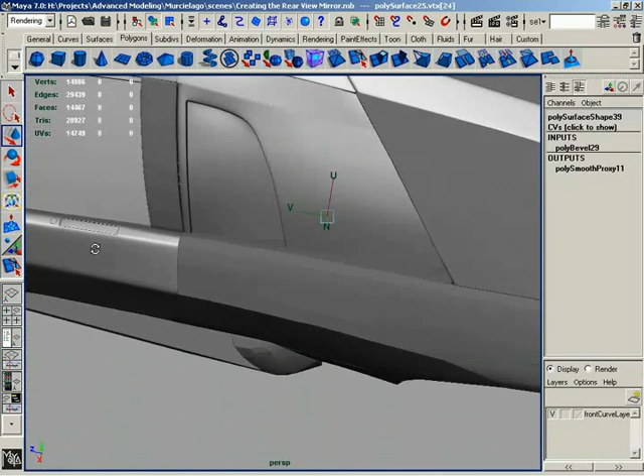Now let's take just a second and put in some more of those thickness edges that we were lacking before. I'm going to temporarily add this edge into the whole thickness edge calculation for the time being, even though I'll probably have to make some adjustments to that when I create the crevice in between those two pieces.

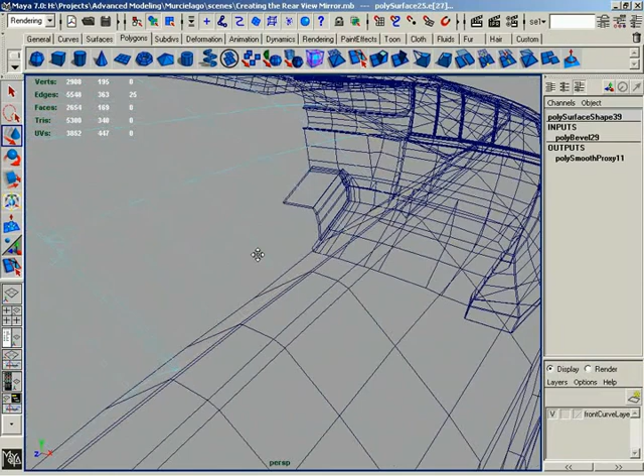Let's go to wireframe view to make this a little easier. We can go ahead and put thickness edges back here to just kind of tighten up some of the geometry back there. Now, probably don't even need to worry about these too much, come to think of it, because they're just tucked right into a piece of geometry. So let me just unselect all of those. I think this is all we need.

So let's go ahead and extrude edges, and I'll push these down in local Z. How far are we going to go with these? Let me shade up the view for just a moment. Actually, that was a pretty good guess, because these are already lining up really well, and that's probably the biggest thing I was shooting for.

Okay, so let's grab vertices right here and frame up on these for just a moment. If you have all these other pieces of geometry getting in your way, remember that good old isolate select. We'll go ahead and auto-load new objects just to be safe in case we create anything - that's just a habit I turn on. Let's see, we have this vertex here which we'll need to snap over. So let's set our move tool over to world mode. Snap, merge. Okay, looks good.

All of this is looking pretty good. We can maybe come in here and just clean this up a little bit.

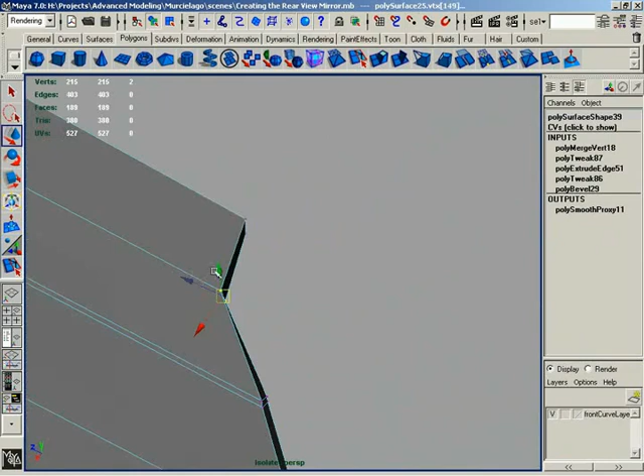Now I'm going to do just something real quick. We'll go ahead and switch off view selected for just a moment. I'll hit Shift tilde so we see both the smooth and the high-res models. Grab them both at the same time, and then let's turn isolate select back on so that I can toggle between these two and still see them both.

Okay, so this is a good start on this piece. I would like to now go ahead and put the little crevice back in up here now that I've taken it out a couple of times. So maybe I should start by removing that just for now, and we'll make sure that it's gone back here as well.

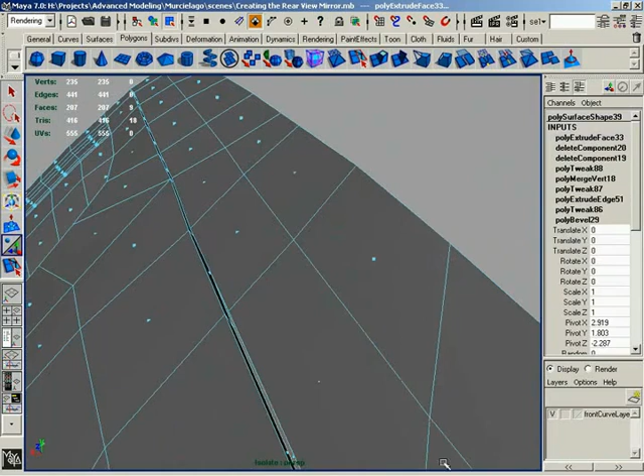Now we'll grab each of these faces again and extrude them, pushing them down in Z world. How far down are we going to go? Probably gauge that by looking at the smooth mesh. Wow, maybe not that far. Right, there's not too bad. And we're probably going to end up beveling it anyways to clean things up.

Let's go ahead, for the sake of our geometry, and delete out the end faces on these extrusions, like so. I'm also going to grab our split edge ring tool and make a split down the middle of each of these faces. This is just so we can merge some vertices.

Let's go ahead and do that now. We'll switch over to vertex. Let me frame up on this one little vert all by his lonesome, and we'll snap him right over like so. Snap this one over to his corresponding vertex. We'll grab all four of them, merge, and they become two, which is excellent.

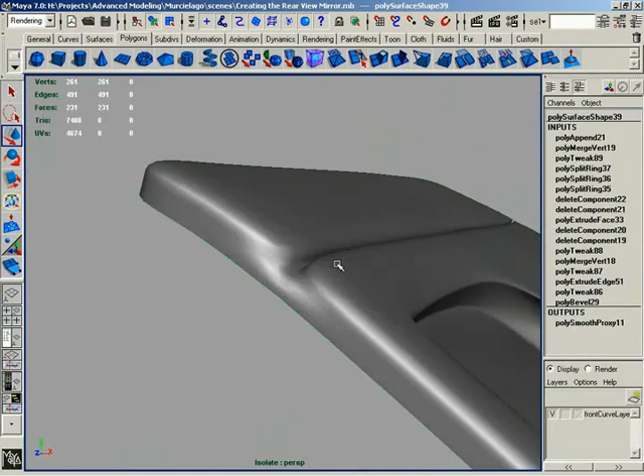Immediately, let's go ahead and grab the append to polygon tool, and we'll close in this little gap. Check it out in smooth, and you can kind of see what that's doing, which is exactly what we want for now. Even though it is a little bit over-smoothed on the corners, that's fine.

Let's go back and get vertices. I'll frame up on these two. You can probably just do a merge to center, and it'll work just fine. Merge to center - oh, didn't mean to chamfer that. I need to go to object mode, shift right mouse, append to polygon tool, and kaboom. So there you go. Now everything is in place, but over smooth.

And how do we solve the over smoothing problem, kiddies? We bevel. So let's grab some edges to bevel. We want this edge all the way down, and we want this edge all the way down. This edge, we can go ahead and bevel this one, so we get kind of a joint across there.

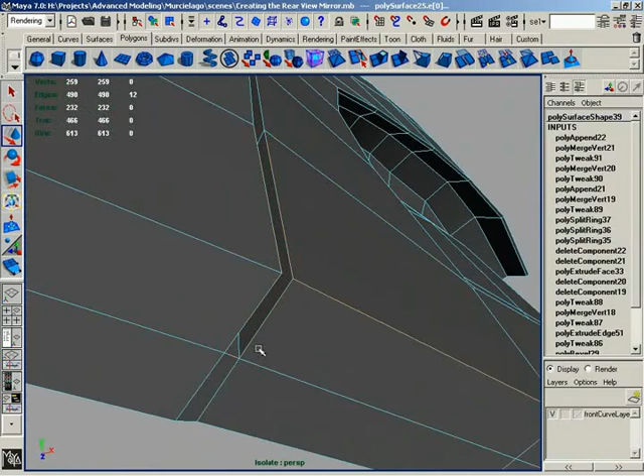I'm going to split off in two directions. This direction will go all the way around. We'll bevel this corner. Send this all the way down the shape. We'll get this corner. Send this piece down.

And that's a border, so we probably don't need to worry about that at all. Now let's just go along the top. I don't think for the time being that I'll bevel the inside edges of this crevice, this little trench. I don't think we'll need that. We'll just get the top edges for now, and that should create the look that we're going for.

It looks like maybe we might want to go through and straighten this up at some point. We can do that after we get done beveling. I just have to select a couple more vertices on either side.

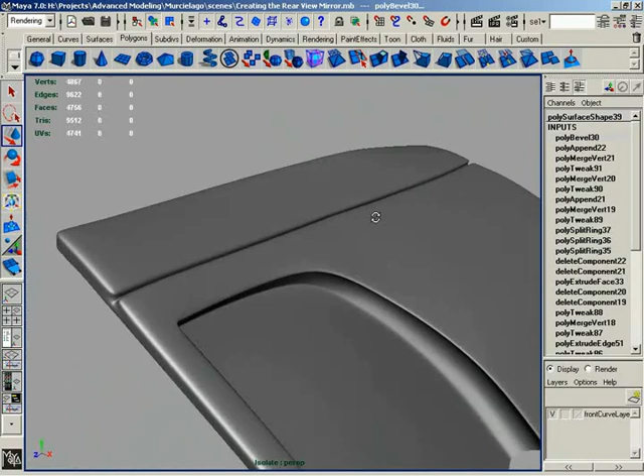Alright, so we bevel those edges, and the bevels are huge. They don't look too bad, though, all things considered. We will tighten them up just a little bit, so we'll take that offset and bleed it down. That looks pretty good.

Now let's take just a moment, and we'll fly this thing like the Death Star trench, and clean it up. Looks pretty good, that looks pretty good. Looks like we have a little bit of a hitch up here.

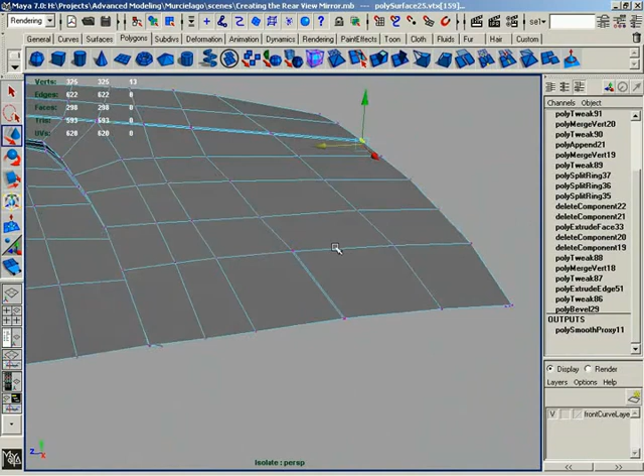And probably just take these verts here at the very end and straighten those out. Slide that back a little bit. Got a pinch here, and I wonder what that's all about. Oh look, we probably grabbed an edge we didn't mean to, and we beveled it.

Easiest way to fix this, because we don't want to undo, is just merge some verts. Whoops, just you guys - there you go. A little bit of denting up in here, maybe. I'll set our move tool back to normal for just a moment.

Okay, not bad. Well, I'm not too worried about that - that's all up under the inside of the wing. Let's go ahead and show the rest of our geometry and start looking at this in relation to the other pieces of our car.

Now, it'd probably be a good idea to maybe add a little more rounding to this piece here along the top. So let's go ahead and do that now. Of course, we're already in normal mode, which is the perfect tool for that.

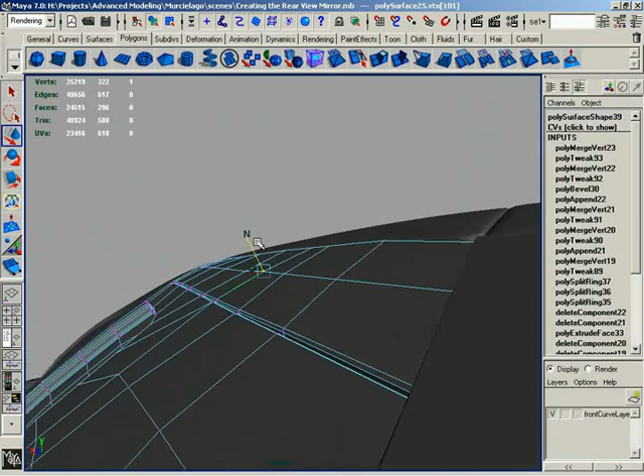Whoops, I probably over-selected there, and I noticed that our manipulator was off by a little bit. Okay, yeah, it looks a little bit better - it's catching the highlight a little more nicely.

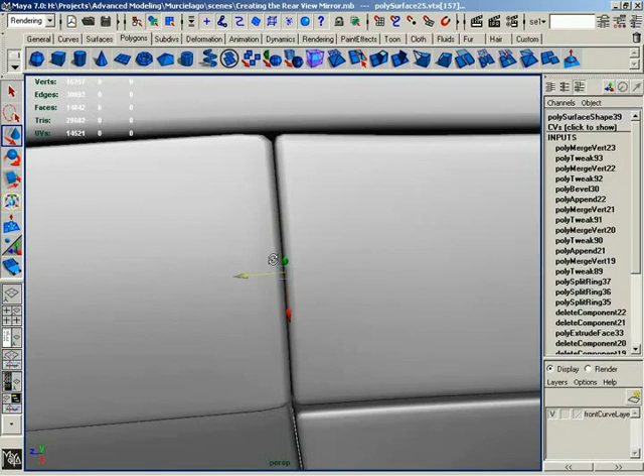Switch over to world mode for this particular row, and we'll go over to our smooth version, and let's frame up. We get that relative altitude set up. We'll butt these up against one another, and pull this up just a little bit.

Okay, so I think that's looking pretty sharp. So, yeah, I think with that, that's going to take care of the entire roof area - well, this area plus a couple more parts. So I think that'll wrap it up for this video. Thanks a lot.